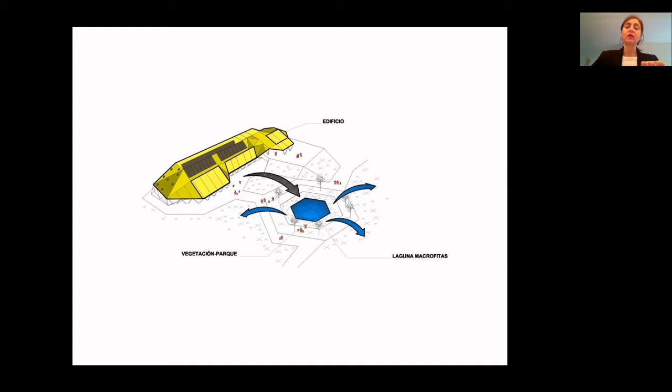So this was a competition for the creation of a kindergarten, a building for kids between 0 and 3 years old. Because of the context in Spain and the environmental issues we have, it was very important to introduce a system to purify and clean the used waters from the building.

So that it could be reused for the irrigation of the public space or garden we wanted to create. We collaborated with a company that works specifically on this, creating a macrophyte system that purifies the wastewater from the building so it can be reused. The wastewater goes into this lagoon and gets filtered first, then filtered by the plants, and then it can be stored underground so it can be reused for irrigation.

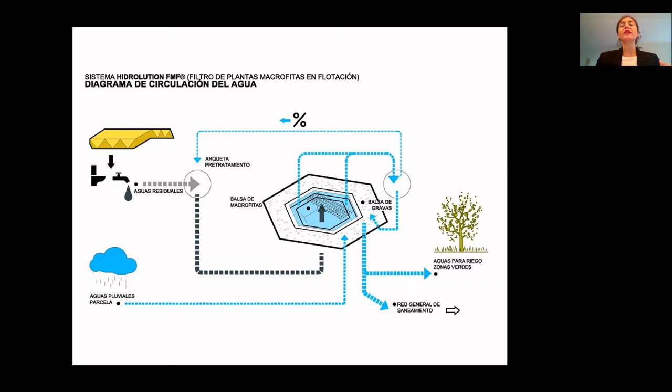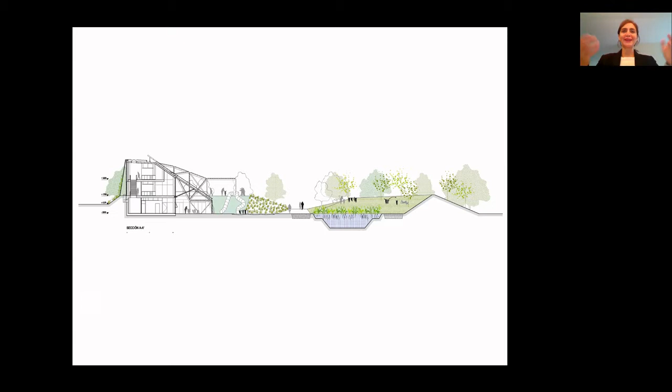This made total sense, not only because we think every landscape we're creating is educational, but also in this particular case because we're in front of an educational building, since this is a school. So we really thought it was interesting and necessary to make this very obvious, not only for architects and events like this, sharing these technical solutions, but also to make this a kind of statement in the city that everybody would be aware of and learn from.

So this is a section in which we can see the building and how the water can get accumulated at the bottom of the lagoon, and then it can be used for the irrigation of the topographies.

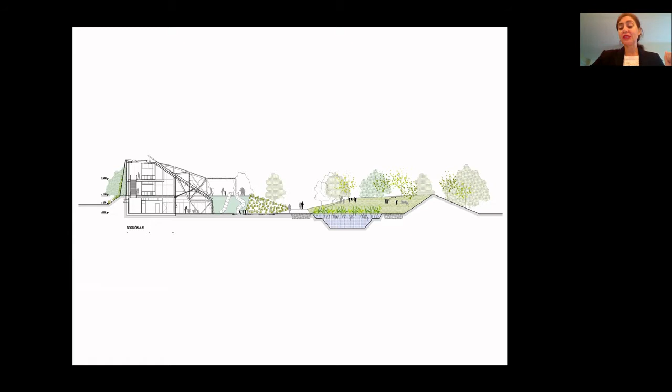Actually, the context is a kind of harsh one. This is an industrial site with a lot of trucks and traffic, so it's not the ideal place for a kindergarten. That's why we worked with the topography to create a more sheltered space, a kind of buffer area, public space, that we thought was quite relevant in this particular environment where public space is not that common.

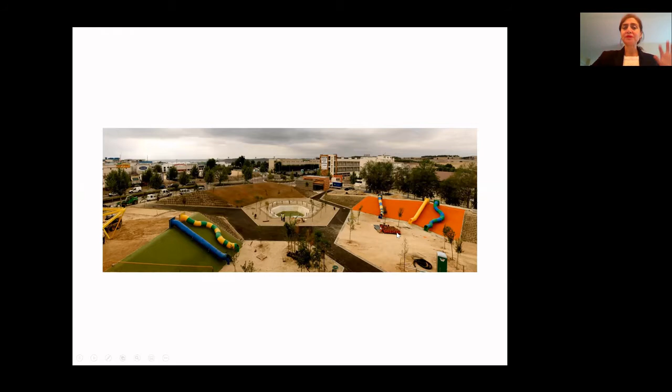Here we can see the topographies we created to make this kind of buffer public space. This is an aerial view of the public space, with some close-ups. For us, it was quite important in such an environment to create this idea of identity and public space that becomes relevant to the community.

So again, the social component goes beyond the construction of the building and beyond the users, because this has become an icon and a landmark in the city of Rivas. And again, it has this educational purpose so that people are aware of the performance of the building and the landscape beyond the users of the building.

The second project within this category is a small project that we designed and implemented in Dordrecht in the Netherlands. It was a competition to create a playful object in the public space. We thought about this idea that sustainability should be playful.

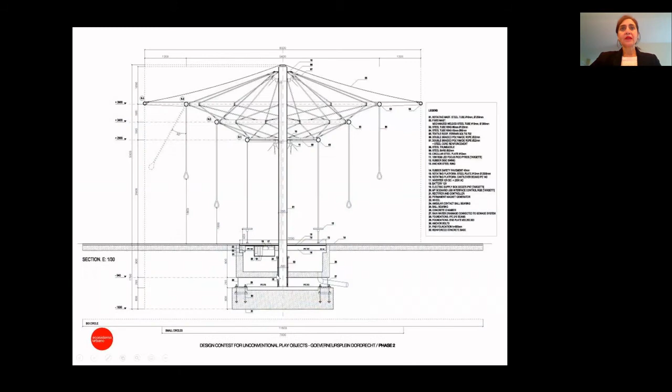So this is a technical section of the carousel, and this is how it looks. It was interesting to go through all the procedures to actually get it built, because it has to meet a lot of requirements by the standards of the European Union. But it worked, we made it.

And again, it's this idea of embedding sustainability into our everyday life and raising awareness about every possible resource, even from an early age.

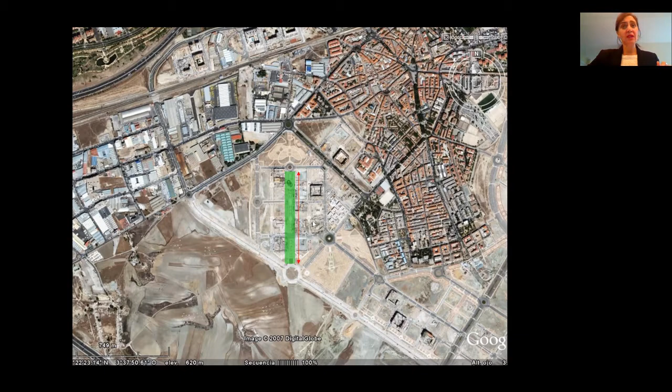So they created this competition for this boulevard, which is 550 meters long and 50 meters wide. The whole idea was to create a remarkable public space in a new urban area, where the public space is not that exciting.

So we got inspiration from this public space in the Jemaa el-Fnaa Square in Marrakech. It's a very flexible space that operates differently in the day and night. During the day it's quite nothing actually, because it's very hot, but in the evenings it becomes a kind of huge restaurant with all these pop-up restaurants.

We also had to consider the climatic comfort because in Madrid, the conditions in the summer are very dry and very hot. So it's actually very uncomfortable to be outdoors during the day.

So we realized and came to the conclusion that the best way to create this climatic comfort was by planting trees, because the trees are efficient throughout the year and they can be support for many other activities.

The only issue with trees is that they require a number of years until they create this kind of comfort. So our approach was: let's create a kind of prosthesis, or a temporary solution, until the real trees are completely grown.

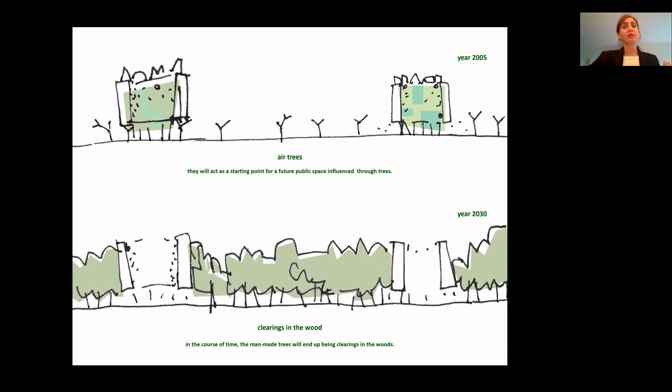So we got inspiration from traditional architecture from the Middle East, in which you have these climate wind catchers, where the air comes through the chimney and gets in contact with wet material, so it creates a microclimate inside the construction.

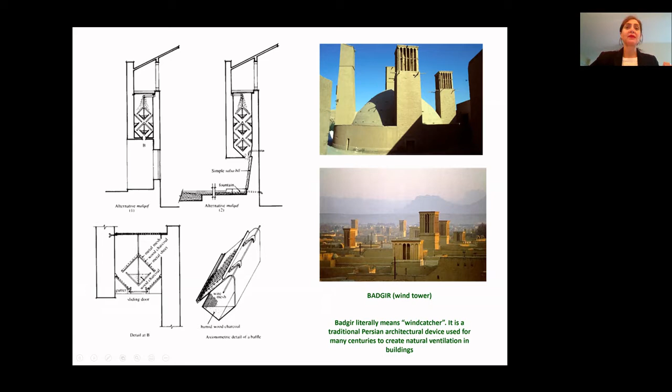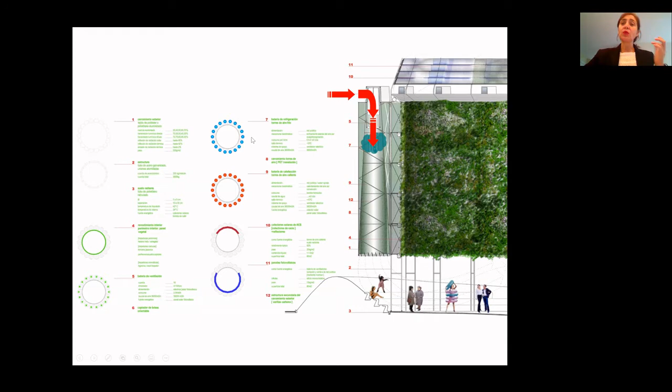So with those same principles, we designed these structures in which the air gets in contact with water atomizers, it gets cooler and therefore heavier, and it creates a microclimate at the ground level.

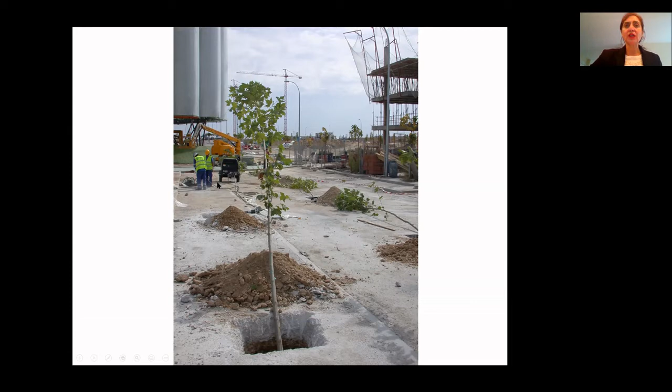And our approach was not only creating these more visible structures, but also improving the condition of the street completely. So one of the actions was to eliminate one of the parking lanes, and it became a kind of tree lane.

Another important feature was to introduce as much recyclable or recycled material as possible. Again, this is an educational approach. This is just a tiny project in the city of Madrid, but we really believe that we're embedding knowledge every time that we're doing something.

So here, for instance, we see the bench, which is of recycled plastic, and also the flooring and the ground, which is from recycled tires from cars. These are all standard materials already in the market, so we didn't have the possibility to produce new materials because it's a small project, so we had to take off-the-shelf materials, and it was an interesting learning process.

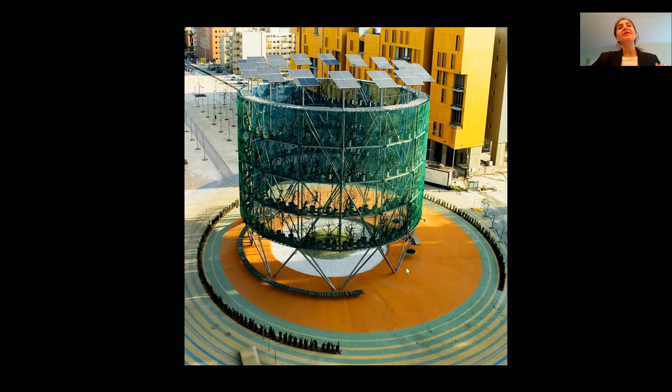This is the inside wall of the pavilion, so it has different species according to the different orientations, and this is how the pavilion looks in the day.

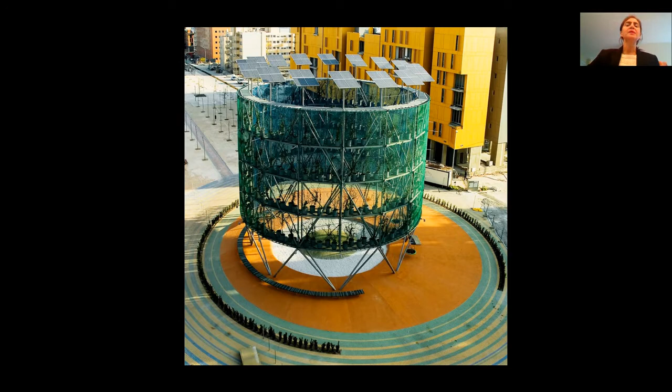So this used to be a crossroad, and now it's a kind of public space that has attracted the attention of especially teenagers in the evenings of the summer. So it's a very active space, especially in the summer.

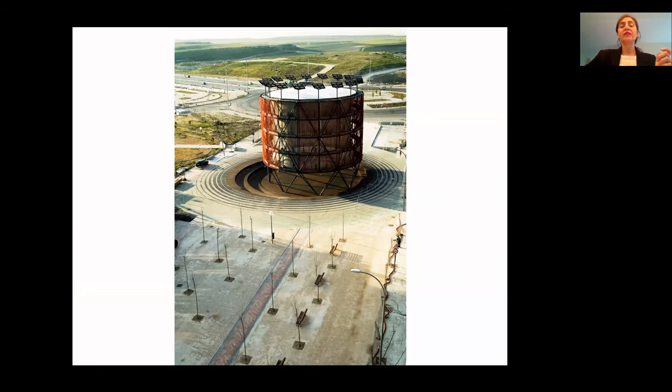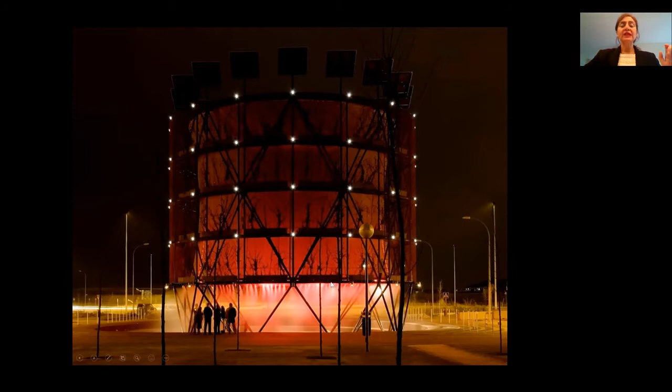The operation is not only about creating these 3 different structures, but also about creating a more pedestrian-friendly street. This is the media tree, intending to become a social hub in the middle of the space that could operate as a huge TV, with a 360 degree projection screen inside that could be used for different kinds of events. This is an image of when they were testing the water systems, and these are different images of how the space has been used for different types of events.

The idea was to actually provide the conditions for people to use this space in many different ways, embedding this idea of flexibility in the public space.

The third topic would be creative public engagement. As I mentioned at the beginning, this is something we've been very interested in, and we continue to explore in different contexts and in different ways.

I'm going to play this video. This was a competition launched by the city of Hamar in Norway. Originally they were looking for an artistic intervention in the main public space, but our approach was a bit more geared to engage the local community, while producing a final design that was the result of this engagement process. I'm going to play the video we submitted for the competition.

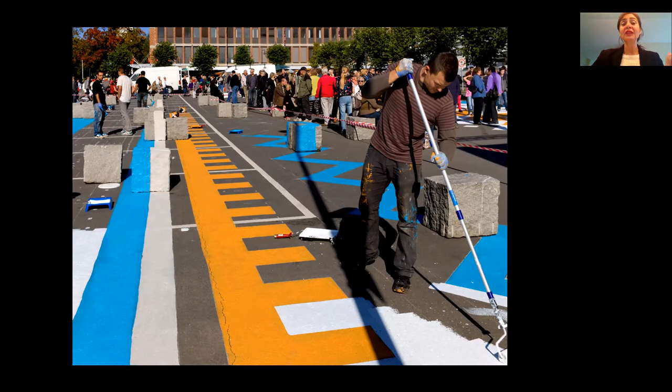We also invited the artist Boa Mistura from Madrid to transform it. In just a couple of days, they transformed this parking lot into a beautiful setting for having a meal. We held different workshops, mock-ups, and activities in the public space.

So the whole point was to show through the experience that the space could be much more than a parking space. So we had this workshop with students from BAS, the Bergen Architecture School.

We also had this activity, which was the Green Hamar. So we had the Dream Hamar, Green Hamar, Light Hamar, Play Hamar, and so on and so forth. All of these enabled us to start reaching out to the community.

Another way of engaging the community was through the teenagers and the youth. So we created a collaboration with the city, and more than 1,400 kids actually created possibilities and brainstormed themselves for the future of the square. They produced these models and so on. It was interesting, a little bit overwhelming, the amount of information and inputs that we gathered through the process.

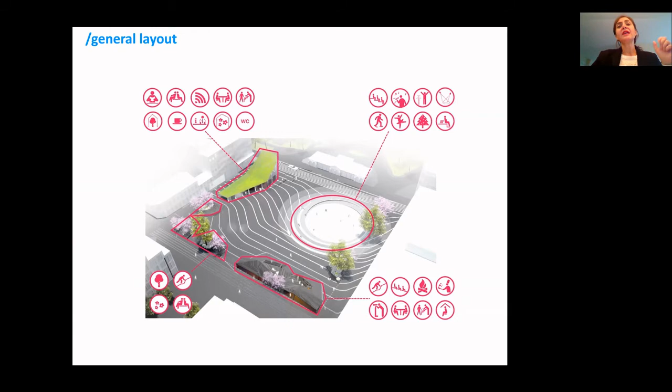At some point we had to get all of this together, filter it, and create a project that was the outcome of the whole process. The project included four different elements, mostly the social ring, which was conceived as a water feature for the summer and a skating rink for the winter. It was built recently, and it has become a very popular space.

One of the things we discovered throughout the process was that the project was not only about the square, it was beyond the square, it was about the city center. The city center is really struggling, competing with all the shopping malls happening all over the place, because the malls are comfortable climatically, both in summer and winter, and the city of Hamar is quite cold in the winter.

So we really realized it was not only about making a beautification project for the square, it was mostly about creating the possibilities of having activities. It was about giving people the reason to come to the city center. The water feature and the skating feature work toward that end.

But it was also because of the slight slope that the square has, the idea was to create a venue for activities. So there's been a number of concerts. It was designed in such a way that it's actually a platform or framework for more things to happen.

Okay, so I'm going to be talking about two more projects. Asunción, which is in Paraguay, is a completely different context and completely different scope as well.

It was an international competition for the city of Asunción, in particular a master plan for the historical center. By reading the brief, we realized there had been a lot of previous studies, feasibility studies and preliminary designs for the city center. It was interesting to see that a lot of information was already collected, but not much had been implemented. So we focused on that point of management, and what could be the element to untangle this and make things happen.

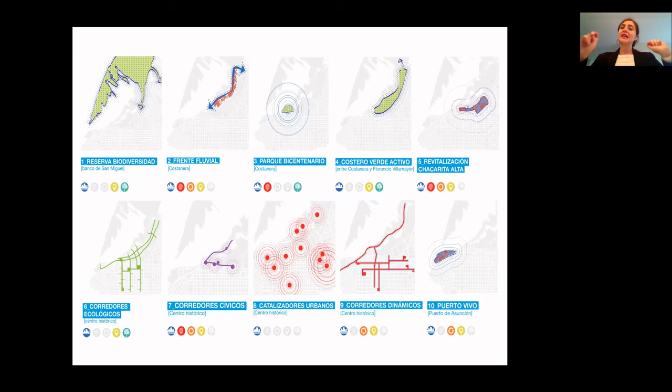There were about 10 institutional projects that required the attention of the government. We always envision the transformation of the city as a process, because projects cannot be implemented all at once, and cities do not have the resources to do everything at once. So we envision this as a transformation over time with different projects of different nature.

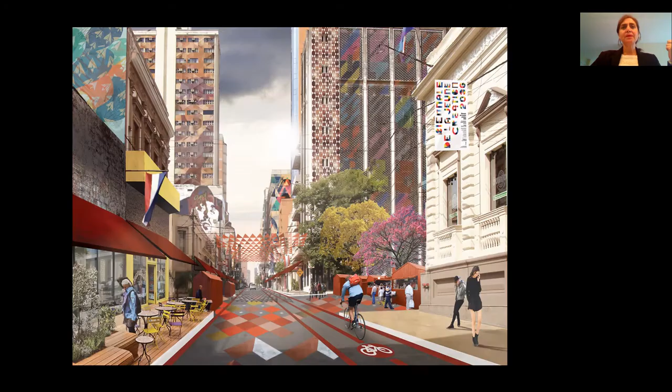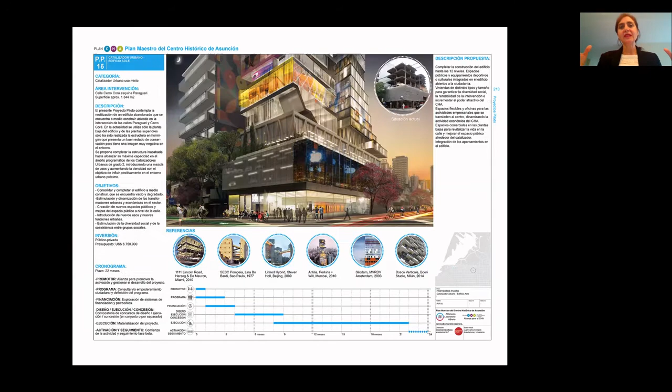The thing I wanted to point out today is that in parallel with the master plan, we also delivered this collection of pilot projects. There were more than 50 pilot projects. The whole idea was to create a catalog of possibilities with projects ranging from $2,000 to maybe 2 million or 20 million.

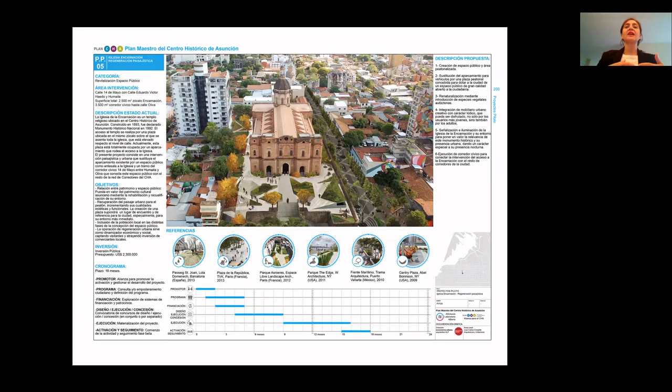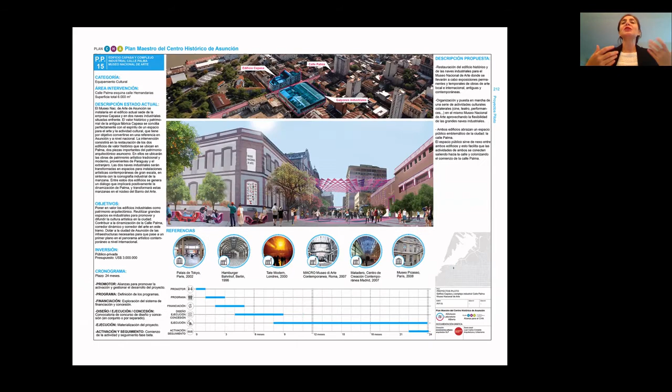The idea is to give the city a catalog of projects that are small, medium, large, or extra large, so there would never be a situation where you don't have the big budget and therefore can't do it. There are possibilities—projects that can be implemented even if budgets are limited.

So, how can we bring the social component into the design component? We delivered a number of activities to work with the youth. One thing we identified is that there was very little connection between kids who had been born in the city and lived there forever and the historical center. For some reason, the historical center had been neglected or forgotten over the last 20 years, so the idea was: how can we reconnect the youth with it?

We created activities with a cartoonish version of the most relevant buildings in the area. Students would create their own stories and have an activity at their school that would somehow connect to their families, since it was to be implemented on weekends.

We also had regular meetings with people, since this is a project with different layers and areas of intervention. It engaged different stakeholder groups, and it was interesting to engage each of them with different types of activities. Another thing we did was collaborate with the local university.

It was interesting to see that as an outcome of one of the workshops, students realized they had been claiming a bike lane for years, so they decided to paint it themselves overnight. It was interesting to see this proactive awareness—how you can become more active in your own city rather than just claiming it should be done by the institution. It was an anonymous action that made the news the following morning.

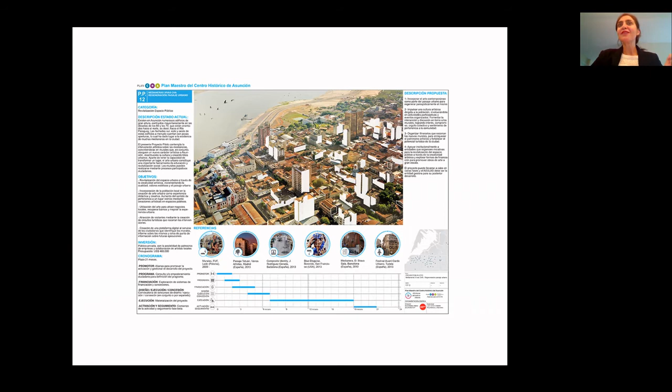In this pilot project catalog I mentioned, one action was to work with the canvas of the city's party walls, which are many. They are open, white, blank canvases that could be transformed into an asset for the city. So the city organized an art festival to transform these party walls into something else, and it was a beautiful intervention.

They invited artists from all over Latin America. It was an interesting way of engaging civil society in the transformation of the city, so it became something relevant. Today, with social media, it's very easy to share content and create interest in urban transformation actions.

Okay, the next project is in a different context, but also connects with many of the things we've mentioned. This is West Palm Beach in the state of Florida in the USA. It was a competition.

Our proposal for West Palm Beach is based on the identification of opportunities, the definition of actions and strategies, and the achievement of key improvements towards a vision of a lively urban environment.

As opportunities for intervention, we consider current values and aspects that could be enhanced. The social context of West Palm Beach is marked by seasonal migration from colder places, an event-driven flow of people from a closer context, and a weekly and daily commute from low-density neighborhoods to the downtown area, all causing important fluctuations in population, economy, and urban activity, with the emergence of an even younger and more diverse population profile.

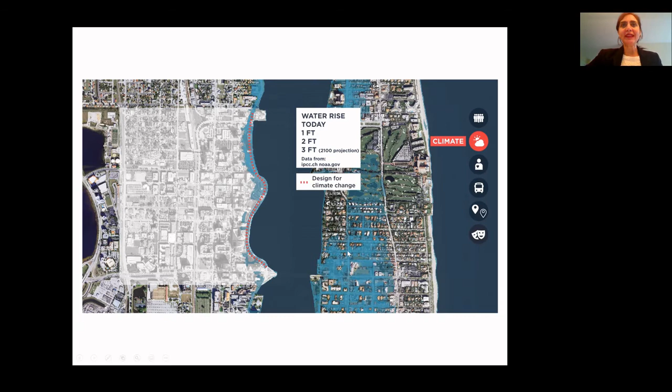The first one was the waterfront. The waterfront is going to be exposed to sea level rise in the next 100 years, but it's not as badly exposed as Palm Beach is going to be, which you can see on the right. So the waterfront is kind of very neat, not very interesting, and we will see it afterwards, but it's obviously very exposed to these kinds of climatic events.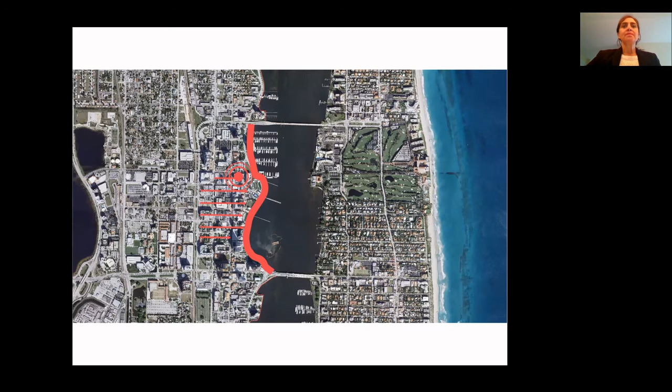This is how it looks today. It's actually very interesting because the city does not have that many opportunities to be exposed to the water at all. As you can see, the waterfront is quite empty and there's nothing really happening except for two particular moments during the year: one music festival that is extremely successful, as you can see, and it becomes extremely busy.

Also the boat festival. So somehow it's very slow, very little busy throughout the whole year, except for those 2 particular moments. Then we have the passageways, which are these kind of alleys that are leftover spaces, used for collection of waste or for the delivery of goods and so on. But actually they are kind of a remarkable opportunity for the city to rethink themselves. As they are today, they're not interesting at all. And then the Banyan Garage, which is a building from the 70s. It's a building that is municipal, belongs to the city, and is very well located.

So the competition brief was asking for solutions in every possible way. There wasn't a required program or anything in particular. It was very much up to the teams to think about the future of the building.

So this is how it looks today. This was our strategy, based on these five principles: renaturalize, connect, activate, involve, and condition in terms of climate. And this is what we did.

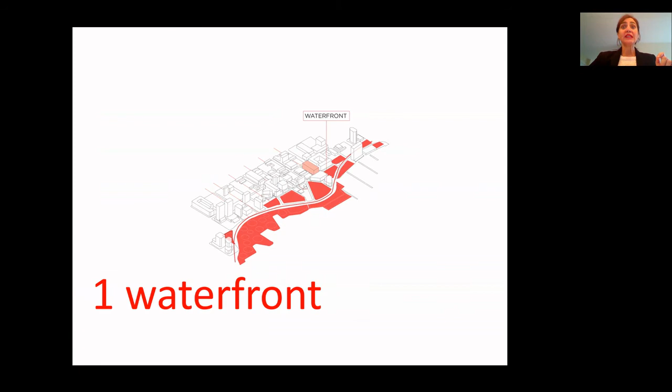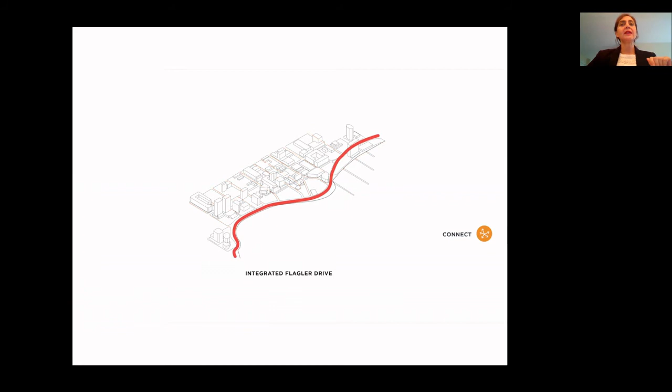We were working on the waterfront to make it more connected to the city by extending the streets, but also making it more pedestrian friendly and connecting it to the existing pedestrian networks. It was an opportunity not only to improve the waterfront itself, but also to better connect downtown, and downtown with the neighborhoods.

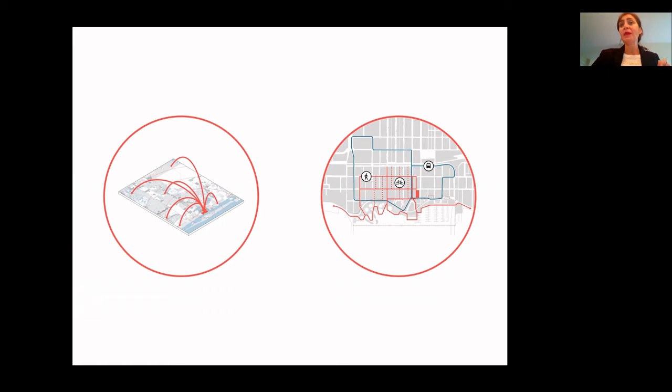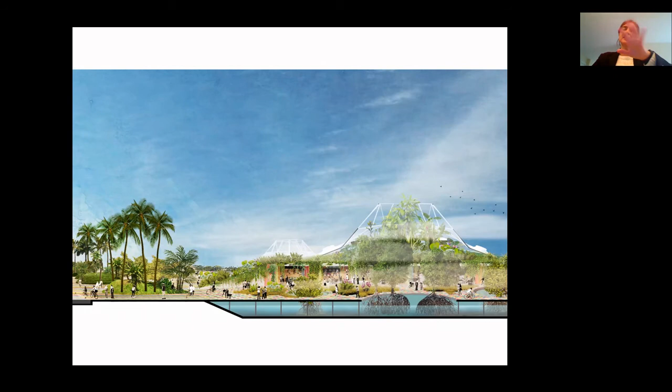We were reviewing all the existing mobility systems. This is Flagler Drive, the waterfront line, which today is basically dedicated to cars. We were making it more of a shared, continuous space, but also creating pavilions on top of the water, which we'll see afterwards.

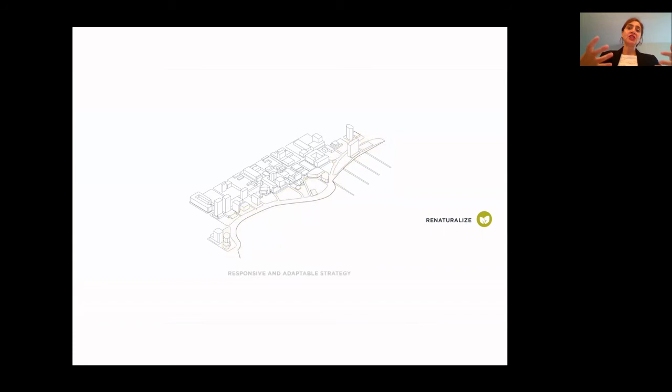For the renaturalization, how can we make the limit between nature and the city blend in a more beautiful way? We designed different kinds of solutions depending on the space, but the whole idea was to create a more fluid and permeable connection between the city and the water systems.

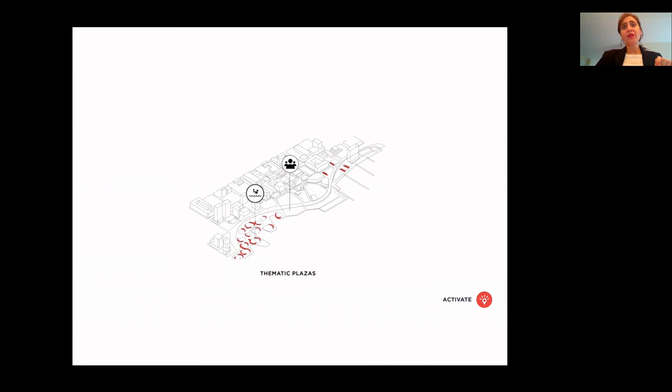We introduced thematic plazas, which are the main feature of the waterfront. These are spaces that will be climatically conditioned. One thing I didn't mention is that the weather is quite mild about nine months a year, but three months are very uncomfortable, humid and hot, and people stay indoors with air conditioning. So the idea was how to create comfort for people to come out into open space, and how to create the conditions and programs to make that feasible.

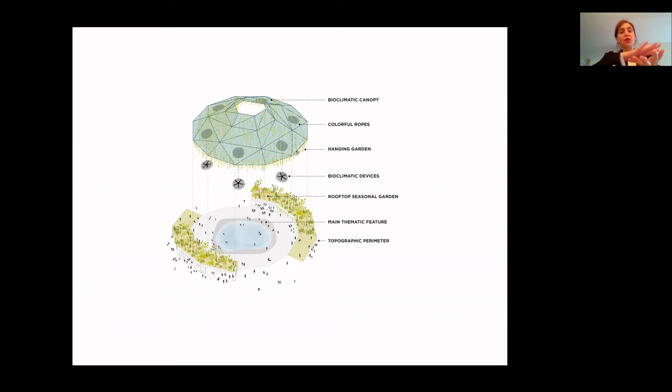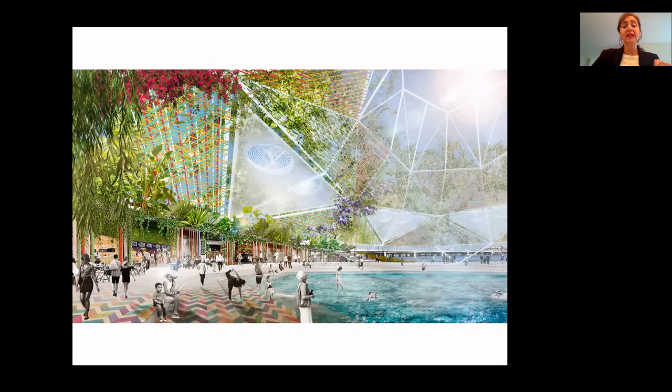So we designed canopies which have some program at the bottom, and are also bioclimatic, with different elements that work differently according to temperature, wind, and heat. This is the idea of how you can invest in the public space.

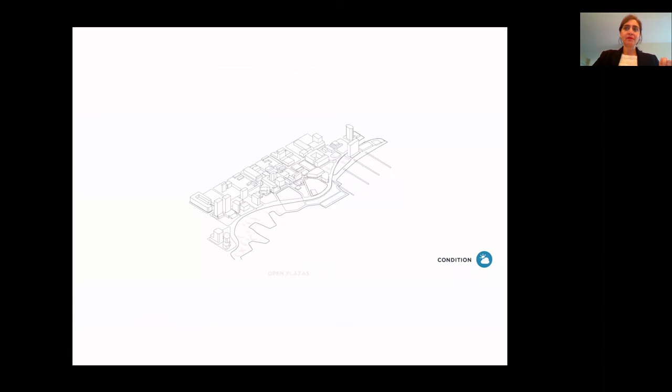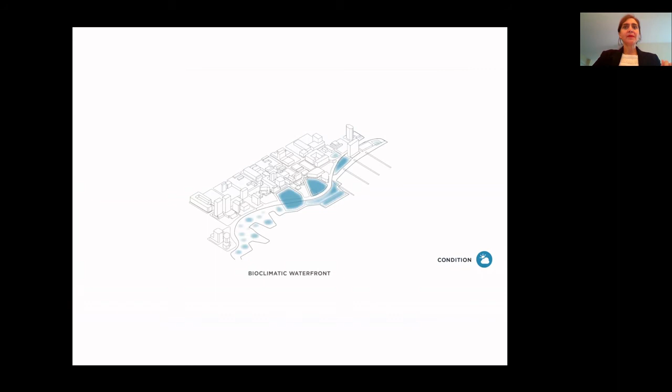The open plazas would be oriented to take advantage of the prevailing winds, and the canopies would be bioclimatic, creating this kind of bioclimatic solution for the whole waterfront.

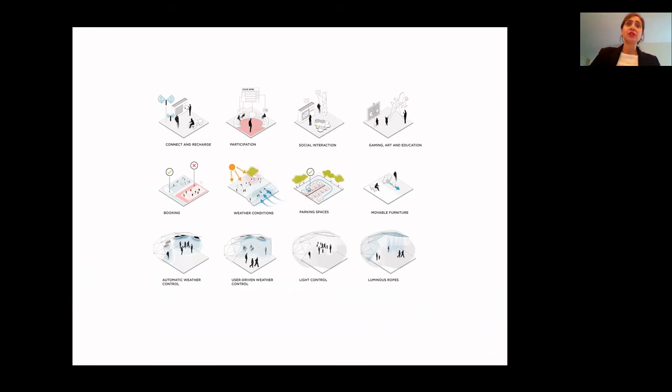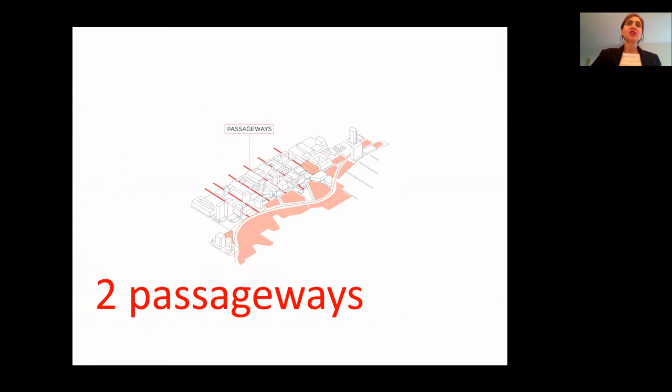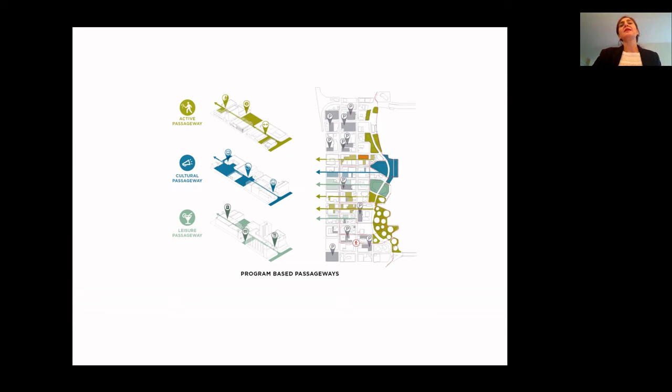The solution for the passageways was to think of them as thematic passageways, creating an attraction for people to walk or bike more, also taking advantage of the east-west orientation to bring the ocean breeze into the passageway, create shaded space, and make it more meaningful compared to what exists right now. It will be created in stages, with different programs.

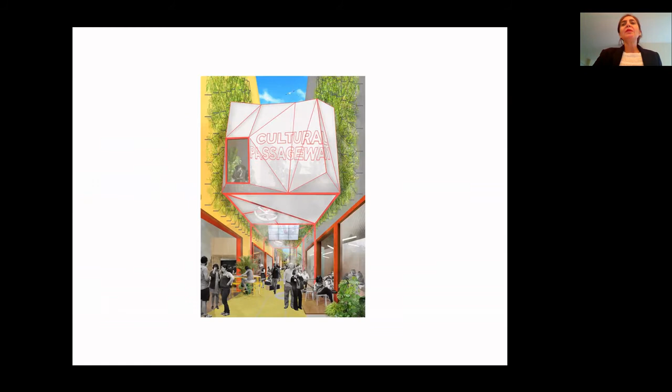The idea was not only to reconfigure the passageway itself, but also to open up the retail spaces in those buildings, creating an interesting connection with the main street. For the Banyan Garage, as mentioned before, it's in a very good location close to the waterfront, so it has huge potential for development.

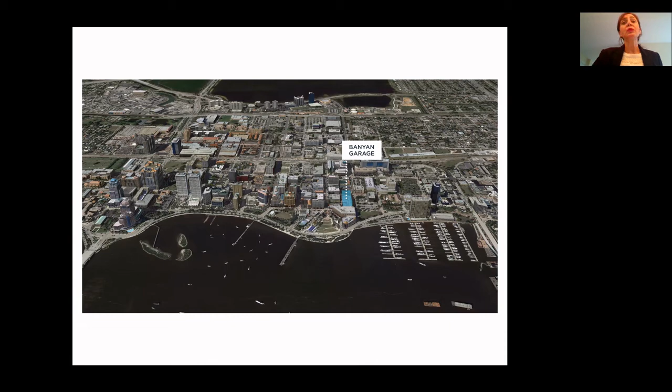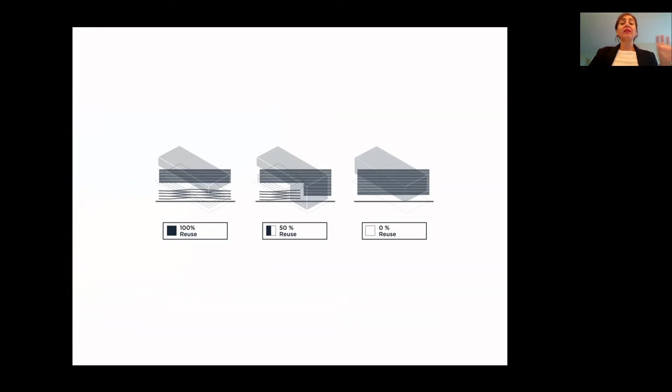At the competition stage, we were considering three different options: reusing the structure 100% as it is and working on top of it, reusing 50%, or not reusing it at all. At the competition level we went with the first option, so the whole idea was to create a garage.

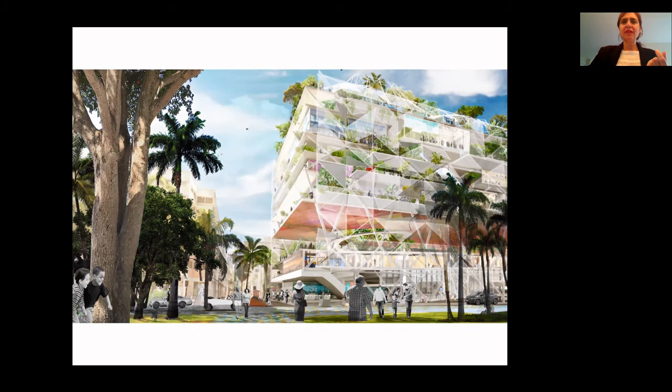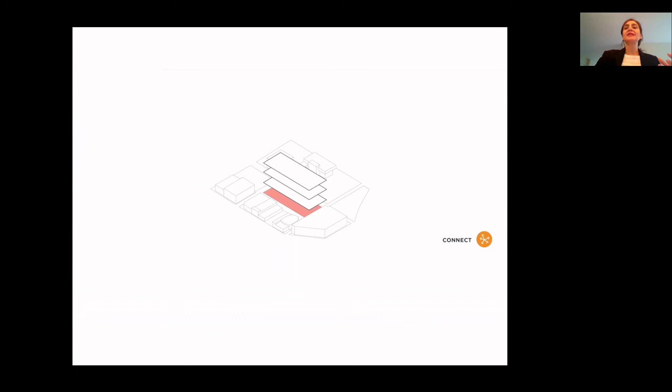There were several principles that were important for us. The first one was the public nature of the building, so no matter what the program was, there would be some kind of publicness to it. We consider the circulation throughout the building as a kind of strip that went up all the way to the terrace.

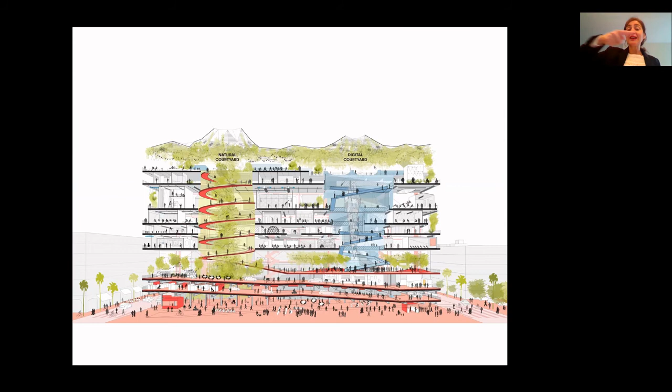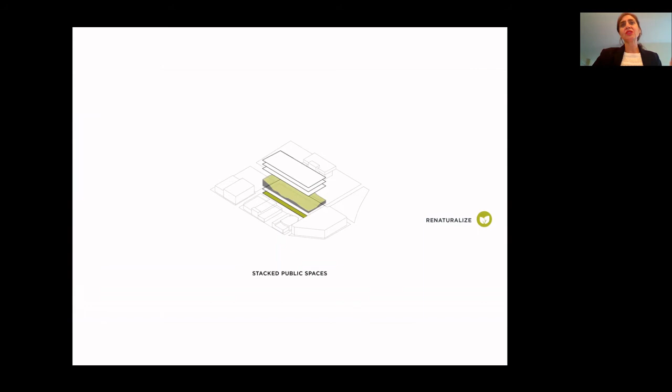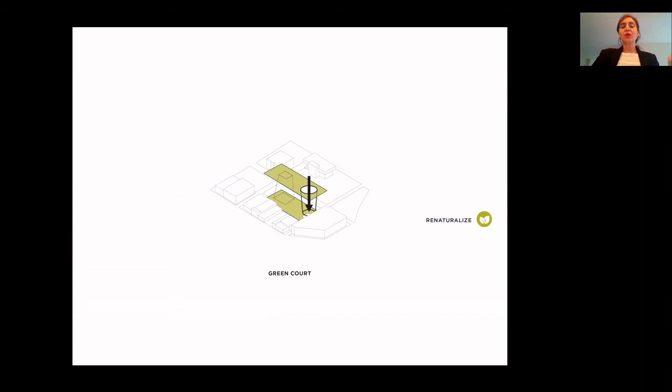This is a section showing this red loop that goes all the way to the terrace, conceived as a public space, as a square. These diagrams explain these topics: the renaturalization, how can we introduce public space and green space in a public building. There was a green court and a digital court that both also had a bioclimatic purpose.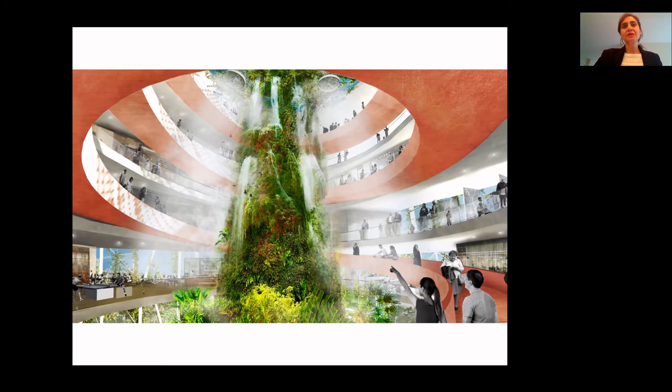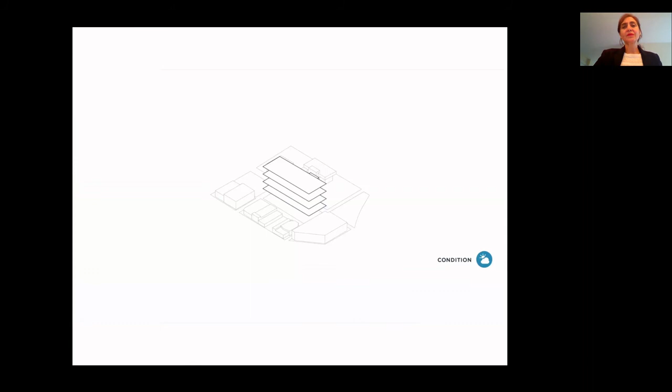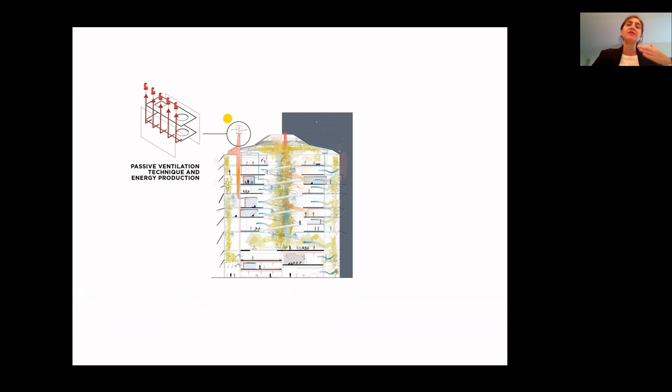This is the digital core. We also introduced other features to make the building as energy efficient as possible, creating conditions so you wouldn't need air conditioning throughout the whole year or the whole building. There were different degrees of conditioning for different kinds of spaces and programs.

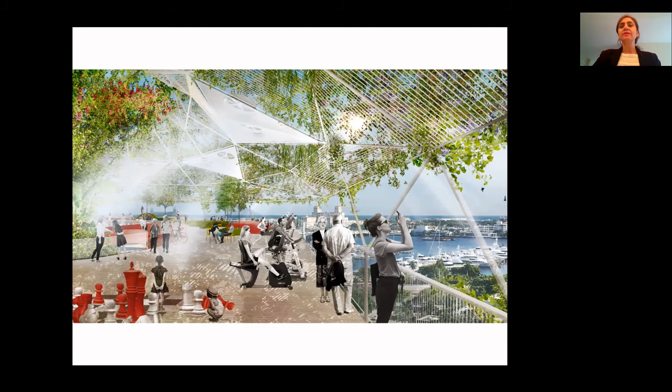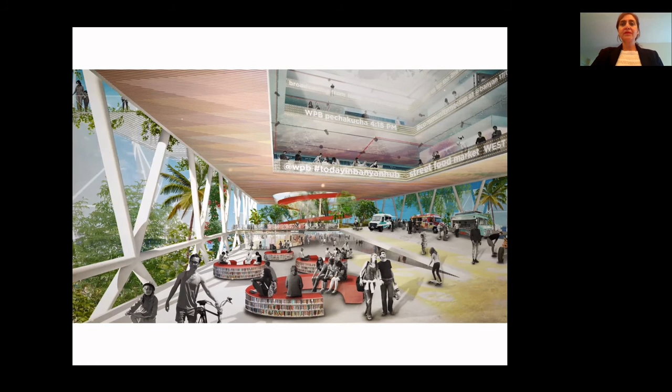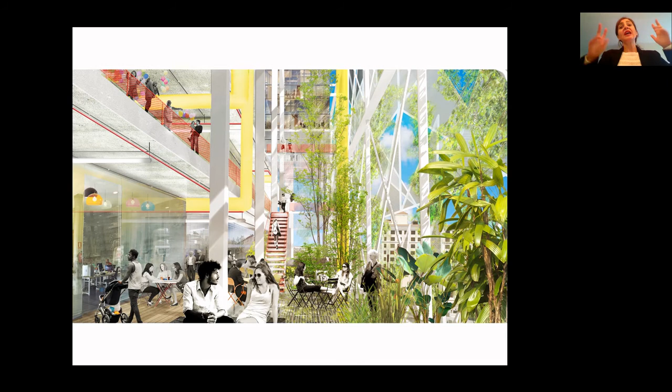This is a vision from the garage, and this is the buffer space in the garage. This is the reconfiguration of the garage building, and this is the buffer facade between the building and the exterior. The whole idea was to create these kinds of green filters to enable natural conditioning without air conditioning.

The idea was to introduce different kinds of programs to serve different kinds of users, so the building would be open 24 hours a day, 365 days a year, open to different users and stakeholders. One of the programs was YMCA, a sports facility. We also introduced housing, office space, public space, retail space and commercial space.

We're going to skip that, and then we're going to watch this video. This video is from a very recent project we developed for the University of Malaga in Spain. It's a project that hopefully will start construction this fall.

It's interesting in the context of COVID, because many educational institutions are exploring the possibility of having some class activities outdoors, and this is actually something we were exploring ourselves when we developed this project.

The project is for the public space of the campus of Malaga University. The whole idea was to make a stronger connection between the university and the city through this public space. I'm going to play the video now — here is the video of the project.

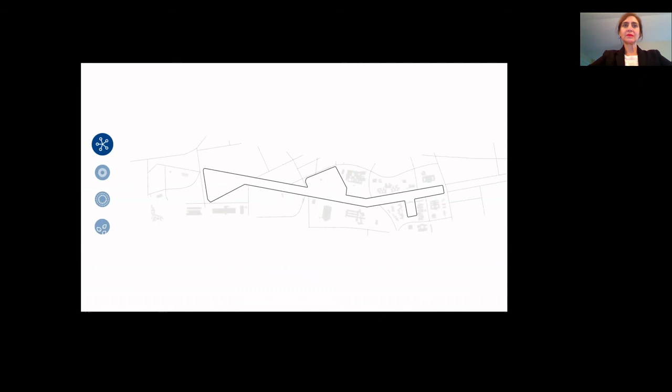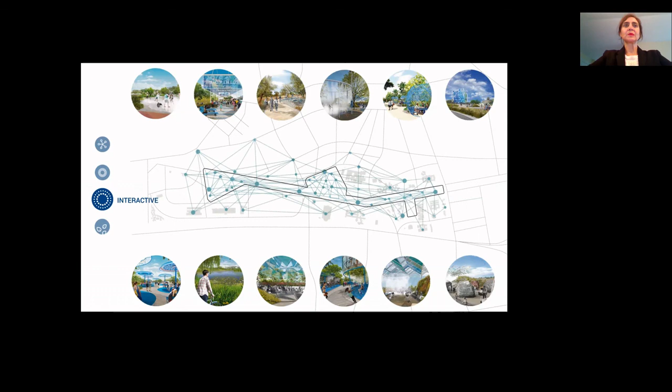At the Universidad de Málaga, the project connects existing facilities and opens up the campus to the public, creating a pedestrian walkway activated by hubs or public squares with learning and leisure spaces, incorporating technology to create an interactive urban environment connected to the digital world. An ecological corridor efficiently manages resources, creating diverse natural landscapes. Pedestrian walkways protected by natural buffers become the perfect setting for meeting up, resting, and relaxing.

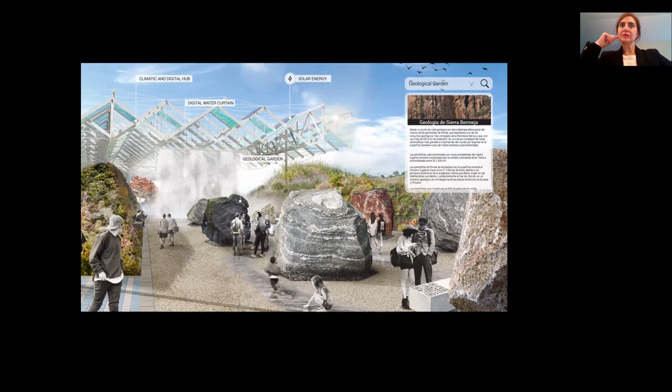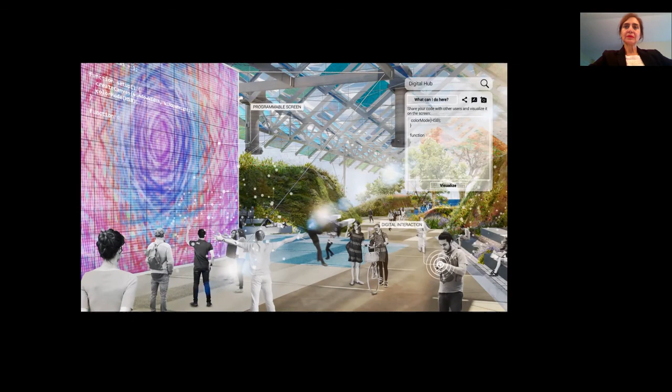Through a digital application, users can interact with the surrounding environment and access augmented reality with academic and cultural content. The Climatic and Digital Hub integrates collaborative learning spaces, allows interactive modification of environmental conditions, and generates all of the park's energy. The Hub's canopy hosts technological systems that connect users to the physical space and the digital environment.

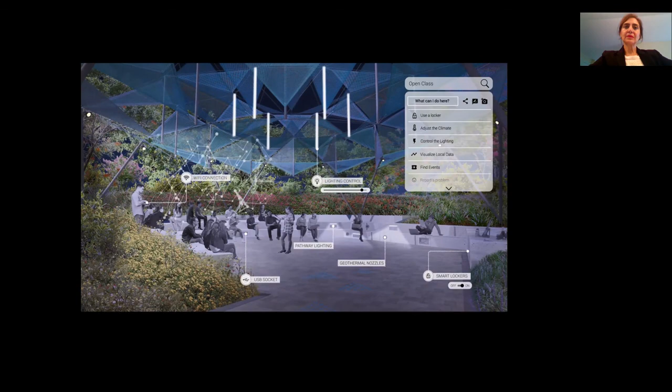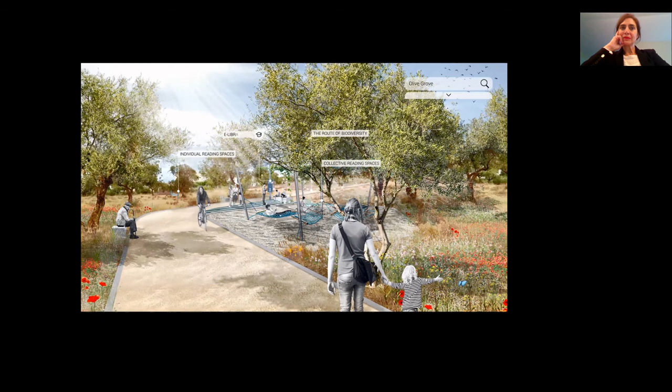Along the boulevard, open classrooms are equipped to extend the university experience to public spaces. An extensive network of sensors generates open data that enables climatic research and allows real-time identification of the most comfortable zones of the boulevard. The tranquil Olive Grove's open library encourages reading and resting while promoting and protecting biodiversity.

A connected, open, interactive, and green campus. An intelligent natural space with positive energy balance and bioclimatic comfort. A positive space where collaboration, creativity, and learning define the urban scene.